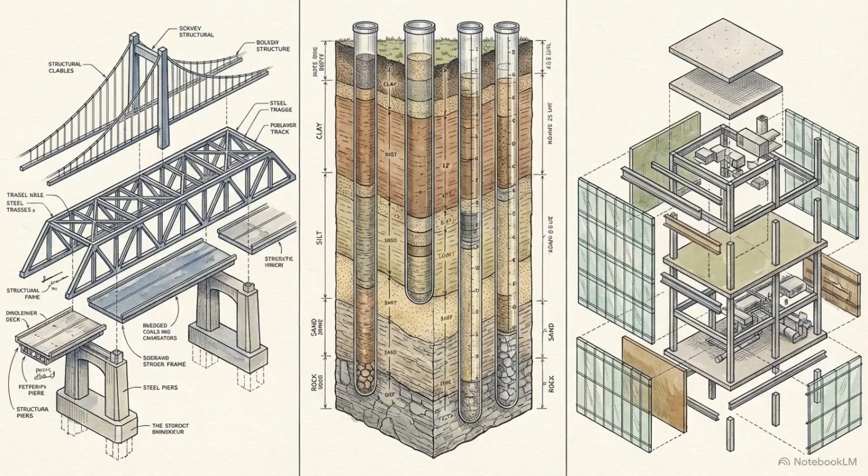A construction project can have flawless engineering, rigorous geotechnical data, and pristine architectural renderings, yet still collapse into months of bitter commercial disputes during execution. This happens because of a widespread professional bias. Architects and engineers naturally rely on drawings to convey their design intent. The NEC3 contract, however, ignores intent and relies strictly on the structured text of the works information.

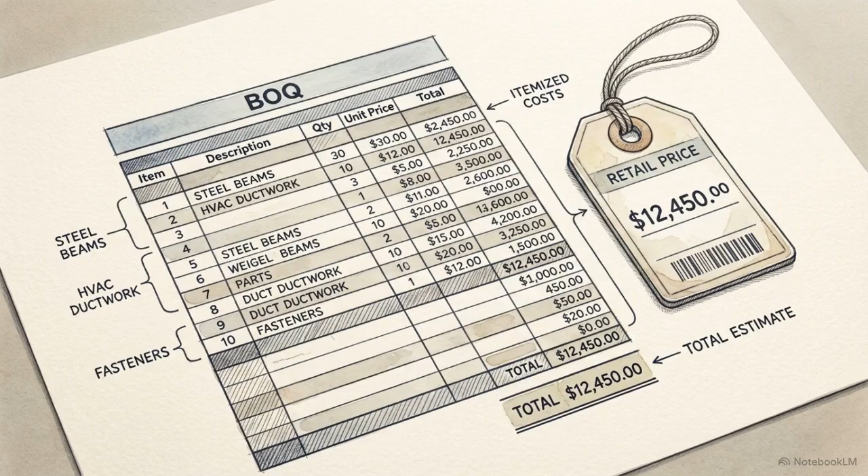Despite this absolute rule, project teams routinely make a fatal commercial error. They rely on the bill of quantities to define the scope of the project. The contract explicitly dismantles this practice in Clause 55.1. Clause 55.1 legally dictates that information in the bill of quantities is merely a pricing mechanism. It is strictly not works information, and it cannot be used to instruct work or mandate how it is done. If a specific material or performance requirement is listed in the Part C2 pricing documents, but omitted from the Part C3 works information, it legally does not exist as project scope.

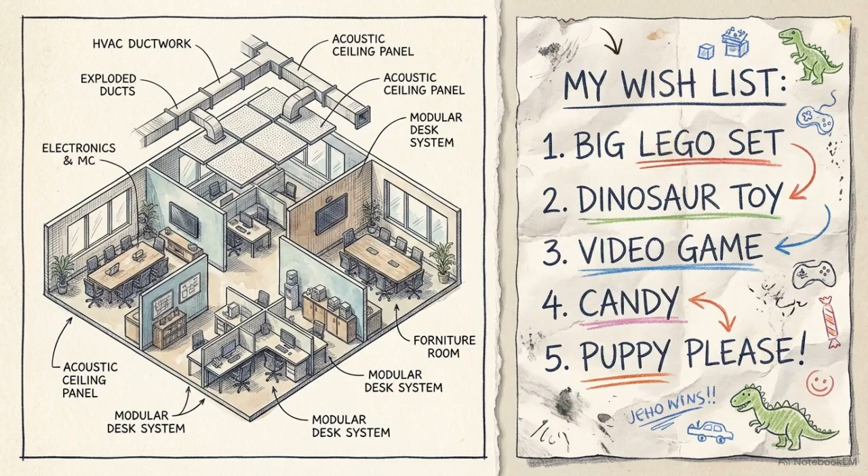To prevent these exact failures, we have to forensically dissect how to structure works information. We will map out how to define responsibilities, enforce physical quality, and eliminate the loopholes that generate compensation events. Failing to properly author the works information transforms rigorous design into an unenforceable, costly wish list.

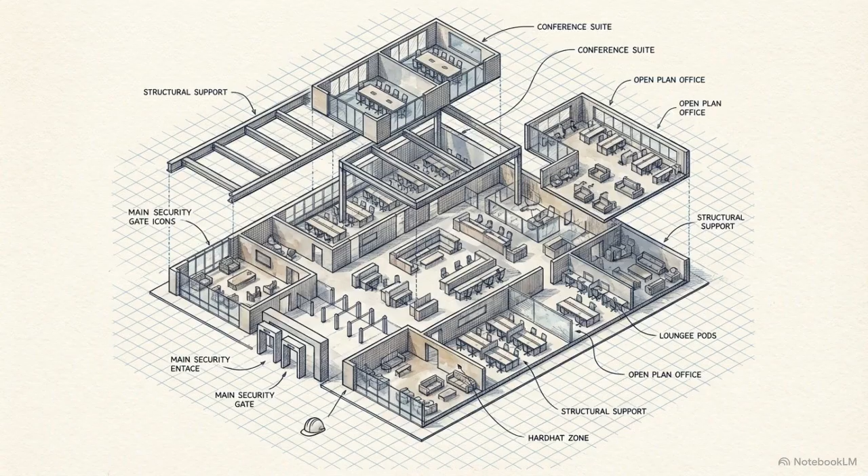The works information dictates both the final physical geometry of the project and the specific methodology required to assemble it within the terminal. In an operational airport setting, these boundaries include heavily restricted security access rules, specific badging requirements for personnel, and designated working hours to prevent disruption to terminal tenants. Any execution scope buried in the site information is unenforceable. True commercial control requires locking every single performance constraint strictly within Part C3.

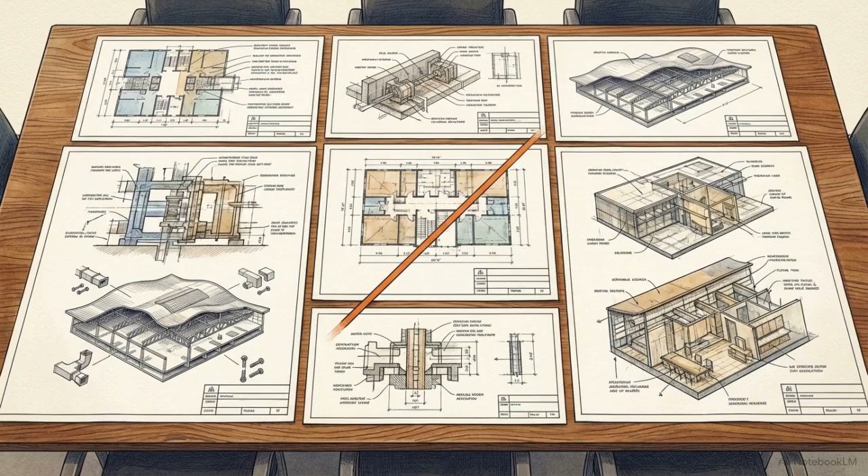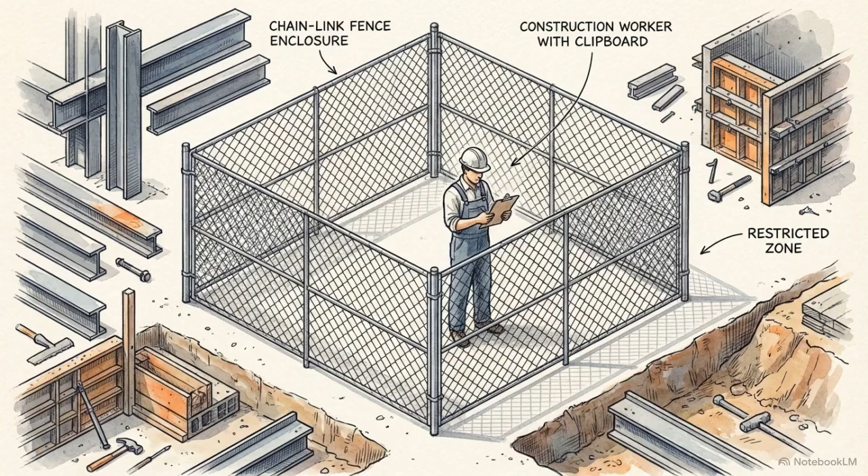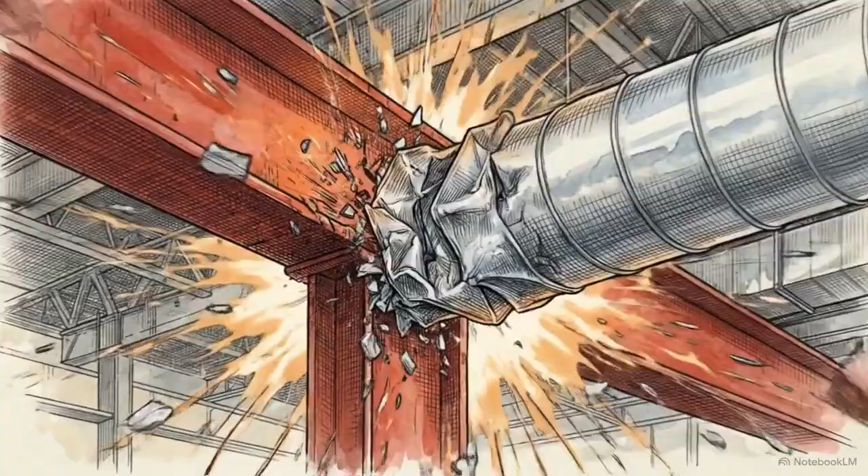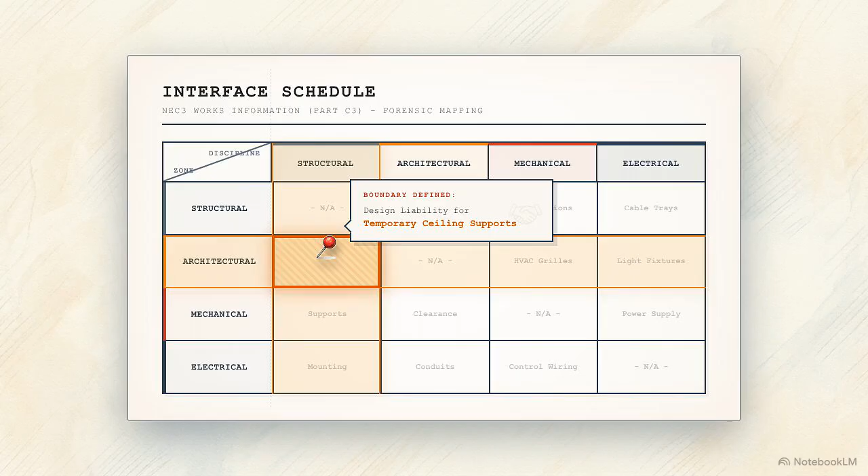This structural mapping becomes critical in multidisciplinary projects, where architectural finishes, structural engineering, and mechanical scopes inevitably collide. To resolve those collisions, the contract uses this interface schedule matrix. It explicitly defines where one party's responsibility ends and another's begins, like assigning design liability for temporary supports before ceilings are installed. When interfaces are left undefined, it leads directly to subcontractor disputes, work stoppages and critical path delays while the parties argue over whose scope a task falls under. A rigorous interface schedule acts as a preemptive legal shield. It eliminates the gray areas where scope gaps breed compensation events.

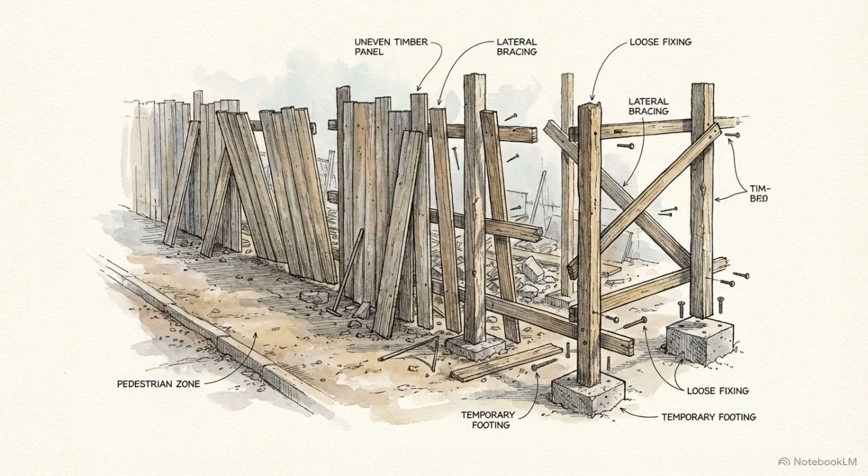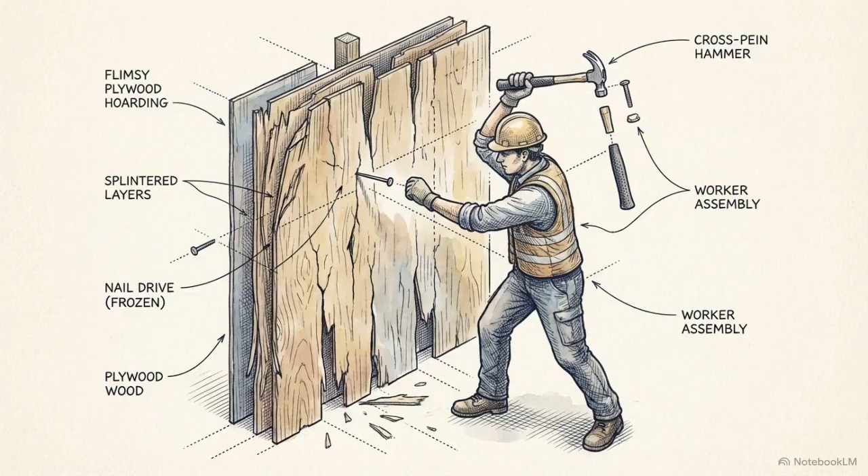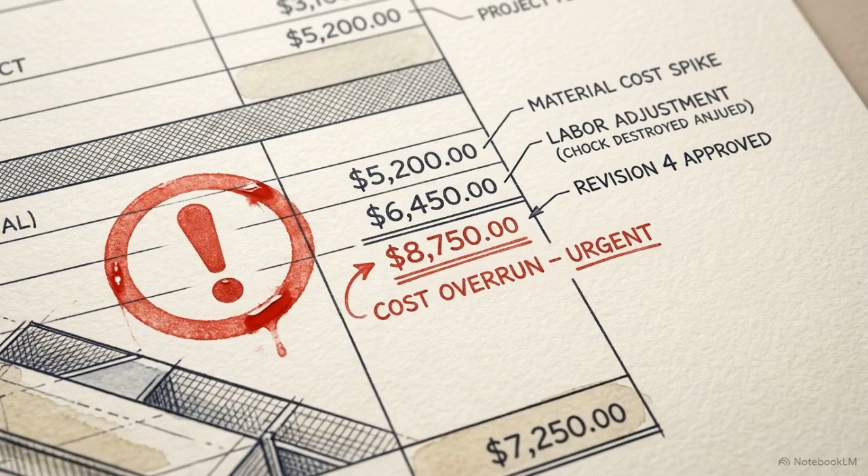We can see the commercial danger of failing to map details by examining temporary site hoarding. A vague specification stating contractor to erect temporary hoarding legally transfers the choice of methods and materials entirely to the contractor. The contractor, incentivized to protect their margin, installs the cheapest viable solution. The employer then attempts to reject the work based on unwritten expectations. Because the initial instruction was vague, instructing immediate upgrades after the fact is a guaranteed trigger for a compensation event.

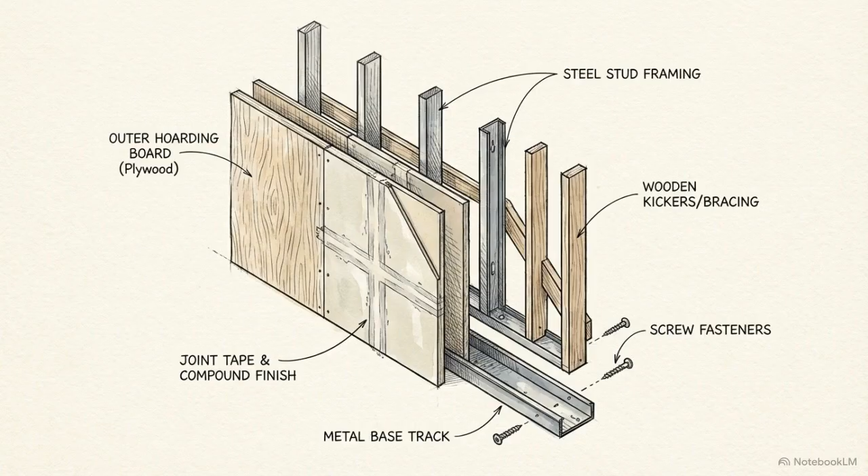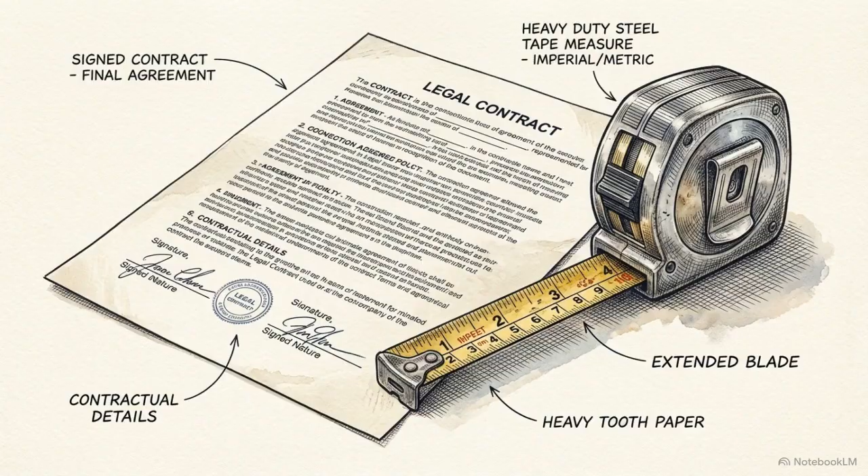By dictating exact parameters, the legal dynamic shifts. Any physical deviation by the contractor is automatically classified as a defect that they must correct at their own cost. Replacing vague scope with exact materials and fixing methods entirely removes the contractor's ability to weaponize their own assumptions into a compensation event.

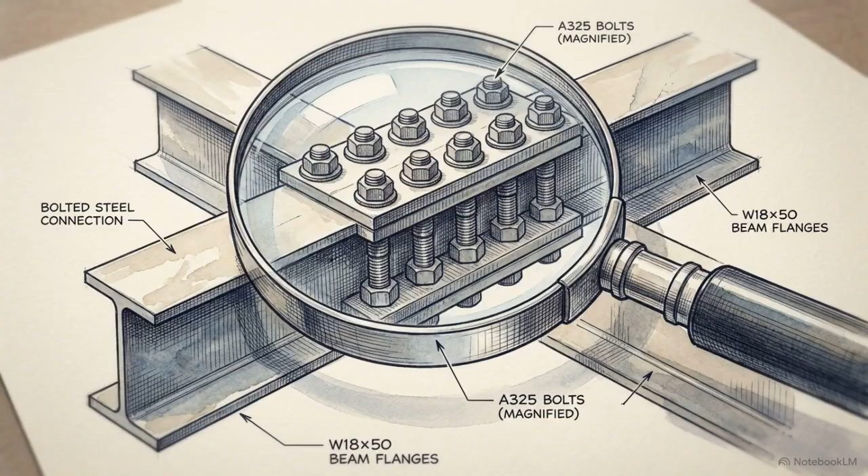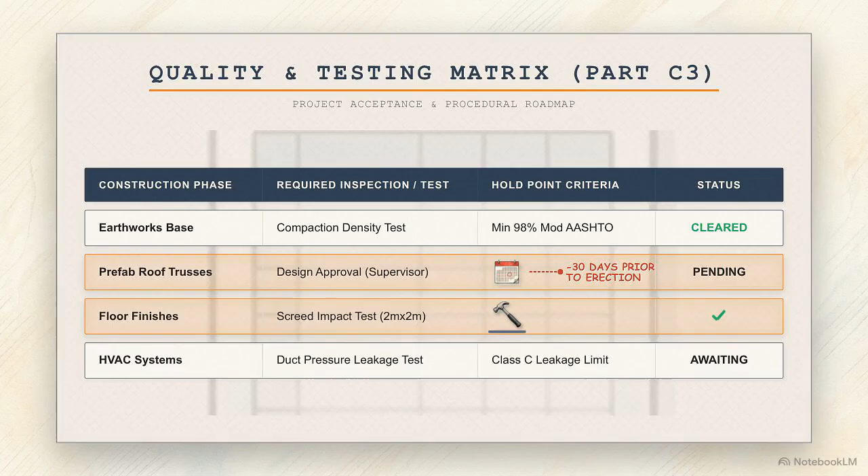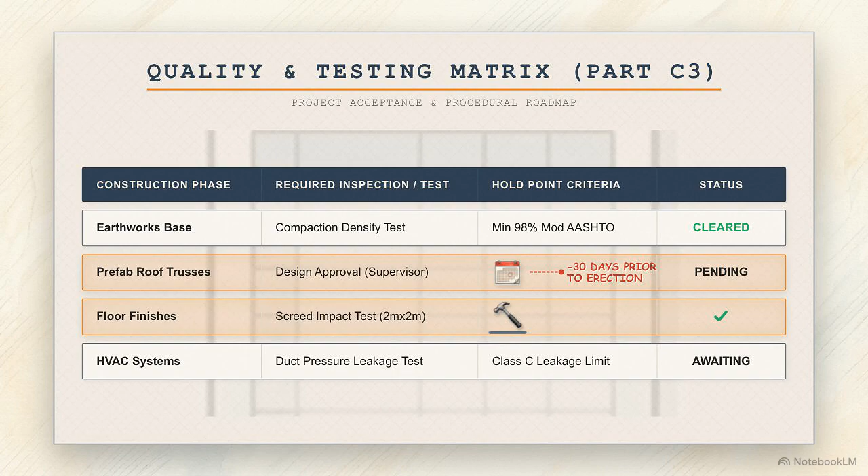Just as it dictates assembly, the works information must mathematically structure the inspection and handover process. The criteria for acceptance must be defined up front. The contractor needs to know the exact parameters the supervisor will use to test the work. This quality and testing matrix details every required test and certification. For King Shaka, it explicitly requires roof truss design approvals 30 days prior to erection and mandates physical hold points like a screed impact test before carpets are laid. Rigorous works information converts abstract design intent into an enforceable legal baseline.

To audit your project documentation, apply this 5-point quality checklist before going to tender. First, are design responsibilities explicitly split in an interface schedule? Second, are all physical and access constraints housed correctly in Part C3, rather than buried in Part C4? Third, are all hold points clearly defined? Fourth, is the quality testing matrix complete? And fifth, is the scope entirely free of reliance on the Bill of Quantities? Applying this checklist determines whether a project will be managed by engineering rigor or managed by lawyers.

Let's test the mechanics of these rules. Question 1. If a material is listed in the Bill of Quantities but omitted from the works information, is the contractor required to install it? No, per Clause 55.1. Question 2. Which document describes the existing physical condition of the site before work begins? That is the site information, Part C4. Question 3. Where must operational constraints, like terminal security rules, be legally housed? They must be in the works information, Part C3.

Question 4. What is the primary purpose of an interface schedule? It is used to strictly map boundaries and design responsibilities between disciplines. And finally, Question 5. If a supervisor rejects a material that meets vague works information but fails unwritten employer expectations, what happens? It immediately triggers a compensation event.